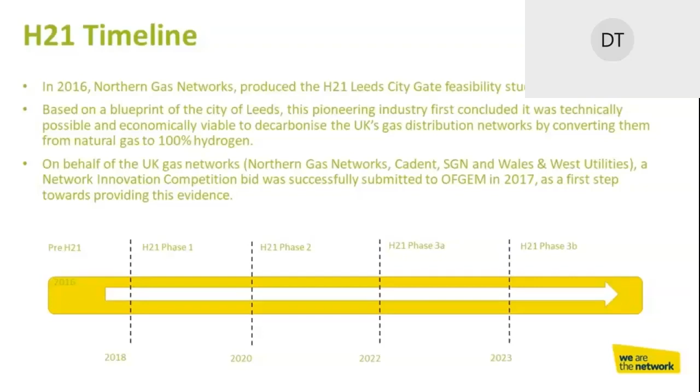So we have a number of projects within the H21 programme. I'm just going to clear up a few terms you're going to hear through this - specifically NIC and NIA, because the project is made up of both. An NIC is, in essence, a yearly pot of money set aside by Ofgem for the gas networks to bid against for various projects, specifically focused on low carbon, innovative, large scale projects such as this. So the networks, as I mentioned, bid for this and are awarded money by Ofgem.

An NIA is an allowance that each network received from Ofgem as part of their price control settlement, which can be used for innovative projects that will benefit the consumer.

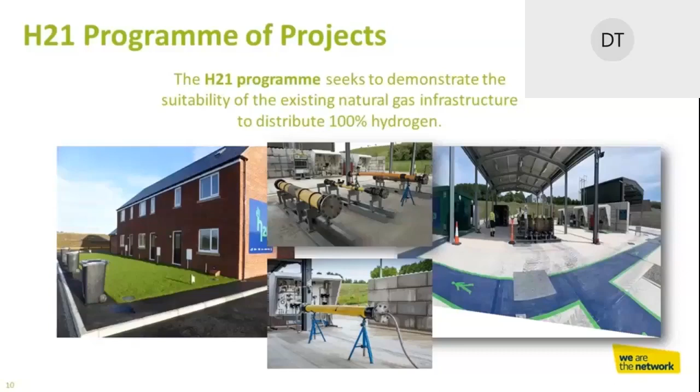So it's just to clear up what they are, really, moving forward, because I'm going to be using them a bit. So, Phase 1 of H21 was split into two phases, Phase 1A and Phase 1B.

Phase 1A was centred at the Health and Safety Executive Science Division laboratory over in Buxton, Derbyshire. That was the asset collection and background testing on what was a world-first test site built specifically for this. It tested a huge range of metallic and PE assets - valves, joints, fittings and pipes - from across the UK, from various pressure tiers and diameters, up to 7 bar assets.

As part of the UK's iron main replacement programme, a cross-section of these assets had been removed from the network, some of them in the ground for up to 100 years. On the specially built leakage rig, controlled testing was undertaken on natural gas and 100% hydrogen to see the difference in leakage levels between the two. Testing was completed in March, April this year.

We then have Phase 1B, on the right-hand side here. This was undertaken at DNV GL's research station up in Cumbria, on the Cumbria-Northumberland border, on the RAF Spadeadam Electronics Warfare Base. Testing completed there in August 2020, and this focused on consequence testing, mainly looking at risks associated with leakage, such as failures, mains fracture, third-party damage, and operational repairs.

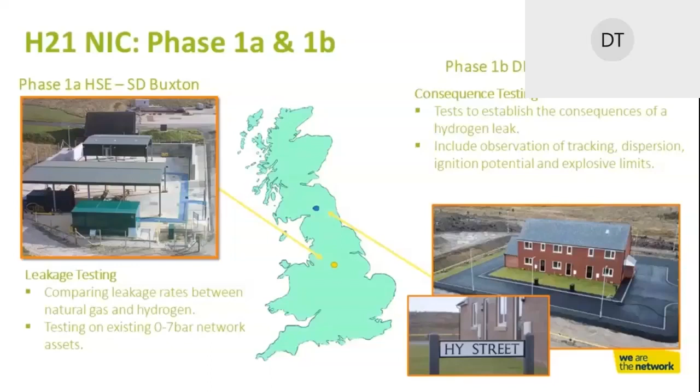As part of Phase 1, we also started undertaking something called our social sciences. Now, as an engineer myself, I personally found this really interesting, and there were a lot of outcomes from this that I didn't expect and found really different.

One of them being that, to the public, safety is not a major concern to them. They understand the safety that comes with hydrogen, the actual additional safety benefits, such as no carbon monoxide, but people give little thought about where their gas actually comes from, or electricity. They just turn it on and it's there.

So that, to me, really gives a good vindication of how safe and how good a safety record the UK gas networks have - that the first thought out of consumers' mouths isn't safety, it's actually cost, which may be the barrier that they see.

So if anyone's interested in the initial Phase 1 report, it is available on our website, so please do go there and have a look and read that - it is quite an interesting read. So I'm going to move on to Phase 2 now.

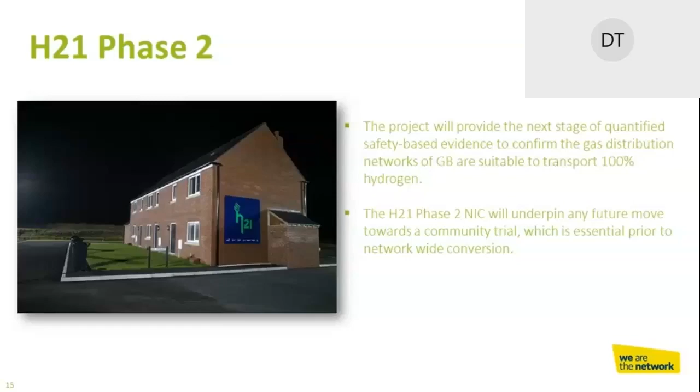Phase 2A is what we call our appraisal of network operations. This phase aims to review, test, and make recommendations to amend the operational and maintenance procedures required to work a network at 100% hydrogen. It's fantastic that there's talk of converting and bringing hydrogen to people's houses, but as a network operator, if we can't physically work on it, maintain it, connect to it, repair it, what's the point? So this is about looking at how we run, maintain and operate a network based on hydrogen.

To do so, we are going to build, and building has started, a bespoke, specially designed distribution microgrid up at Spadeadam. That's going to be built alongside our HyStreet houses, as you can see on the map - the houses on the right-hand side - with us building this distribution microgrid with various diameters to replicate the existing network up to 7 bar, from large diameters down to small. That's going to allow us to do numerous operational tests as we would in the district, to start getting an idea of how we would operate a network.

The procedures have been appraised by the HSE, with a test plan produced to detail what goes on and looking at those procedures. So it's a collaborative effort between us all.

What's really exciting is, subject to their bid being successful, this will connect to National Grid's FutureGrid. It will be a transmission pipeline that National Grid will install to connect to our distribution network right the way down to the houses. We will have a full beach-to-burner research centre on one site. That could be absolutely brilliant for learning, research, training eventually, and to get wider implications. From my point of view as a system modeler, it's also going to be used to validate network analysis software and the equations of state used in our network analysis. It's going to be interesting when that gets going.

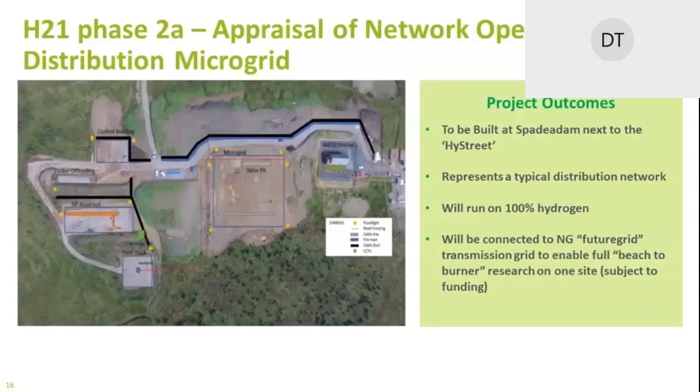Phase 2B is what we call our unoccupied trials. We've secured a site in Redcar in Cleveland where the section of network is currently in use but doesn't supply any end users. Basically, it's a demolished housing estate - the network's still in place, still operational, full of gas, but it doesn't supply anyone.

We aim to start building a test site there in January next year, with testing due to commence in March and end in late 2021. Its purpose is to establish confidence in repurposing an existing, undisturbed section of network. We'll isolate it from the current network and convert it to 100% hydrogen. We'll also continue our operational and maintenance procedure research there as the trial continues. It's going to be a fantastic opportunity to pick up on any unknowns relating to the conversion.

These pipes have been in the ground for decades, and we've done some initial main surveys to see what's there before we dig it up, but we won't know what's happening until we start. It's going to be a really good learning experience to see how these pipes, exposed for decades to fogging, monoethylene glycol, and odorants, behave where new assets haven't had that exposure. It's also a fantastic public awareness opportunity - the public, thanks to the mainstream media picking up on the hydrogen journey, have started to hear about hydrogen.

There's hydrogen trains, talk of hydrogen planes, cars, which might include our little car there, our hydrogen car. But up until now, a lot of the research has been done behind closed doors, such as at Spadeadam, Buxton, rightly so, but this will really bring it to the public.

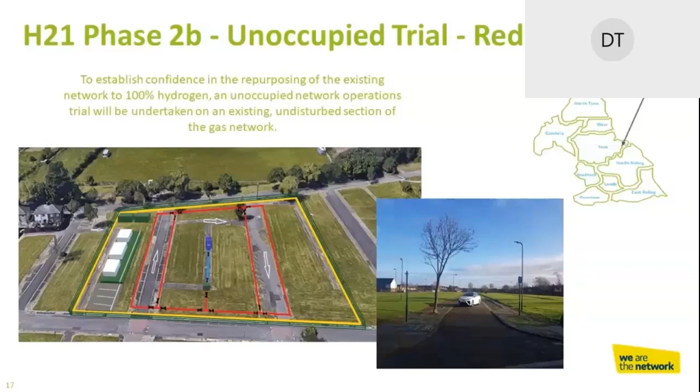They'll see this, depending on what happens with coronavirus, the chance to visit, to see, and actually see this in action. So it's been a really good community engagement as well, and the local community are very much on board.

Phase 2C is what we call the combined risk assessment, quantitative risk assessment. So following successful demonstration on the microgrid and any unoccupied trials, a robust modelling software is going to be built on a risk model for hydrogen in the existing network up to the ECV. I will be honest, this is not my field of expertise, because this is some really clever

modelling and risk building that is ongoing. But what we also have is the HyDeploy programme that I mentioned earlier, and they are doing exactly the same for downstream of the emergency control valve. So the aim will be in this phase is to compare and analyse and align the two QRAs for the two projects. And it's really important to do this at this time to ensure the compatibility of the adjoining systems, i.e. upstream and downstream, that we don't have this disconnect moving forward, and to give us a real overview

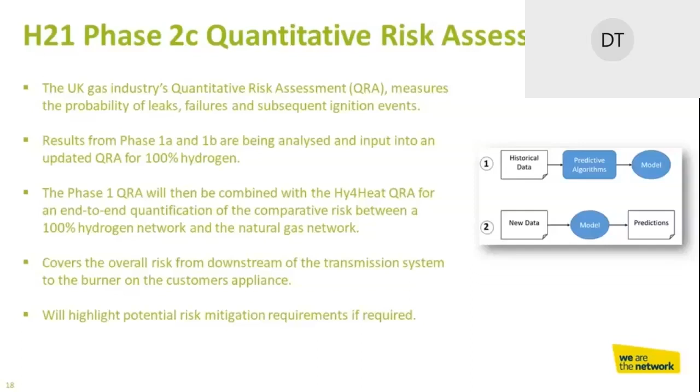prior to commencing any community trials that are going to involve both projects. So depending on the outcome of that risk assessment, it might mean additional safety mitigations and tests are required, but as I say, it's an ongoing risk building, risk modelling software process.

Phase 2D will continue the excellent work of the social sciences, again with our friends at Leeds Beckett University, but this will take it one step further to develop a suite of resources that are going to be used to communicate effectively with the public, because as I've mentioned and as I stress, it's so important we take the consumer on the journey with us.

Informed customers who are equipped to make choices about their energy future are critical to the outcome of this conversion process. We've heard the term fake news quite a bit, sadly. So any misunderstanding, misinformation could lead to poor customer choices and unwarranted concern. In the worst case scenario, if there's widespread misunderstanding and misinformation, it could lead to a wholesale rejection of any conversion and the option of hydrogen could be lost entirely.

So, as the network operator, we are the main point of contact with customers who are living within our networks, and it's our responsibility as the people who undertake the conversion to ensure that customers are properly informed and equipped to make the choices. So this is going to involve examining the language, tone and format of this hydrogen conversation message, and to allow all the gas networks to effectively communicate.

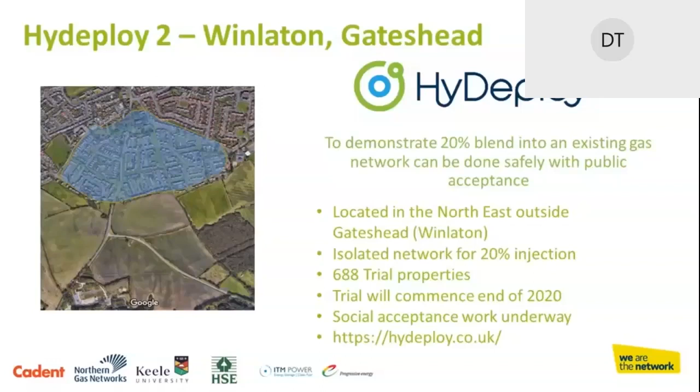Moving on to what we call our InTEGReL site. At the bottom of this picture here, you will see a little site. This is called our Low Thornley site, where the blending will happen. But also at Low Thornley, we have what is called our InTEGReL site - a large 15-acre source site, which itself has a pedigree as being an outstation for the old British Gas Research. So it's continuing its heritage as a research site.

We are building our integrated transport, electricity and gas research laboratory. This is going to be a fully integrated whole energy systems development facility, and it's a place for academia, industry, government, and small and medium enterprises to explore and test new technologies, strategies, and green energy processes for transport and electricity, all in one place, all on one site.

It's led by Northern Gas Networks in partnership with Northern Powergrid, Newcastle University, and more, and it's being used to celebrate our capability of innovation. It's breaking down barriers for hydrogen, and we have numerous plans in different areas on site. It has a high pressure gas section that we can use, and high voltage electricity, so it has a real interesting future ahead.

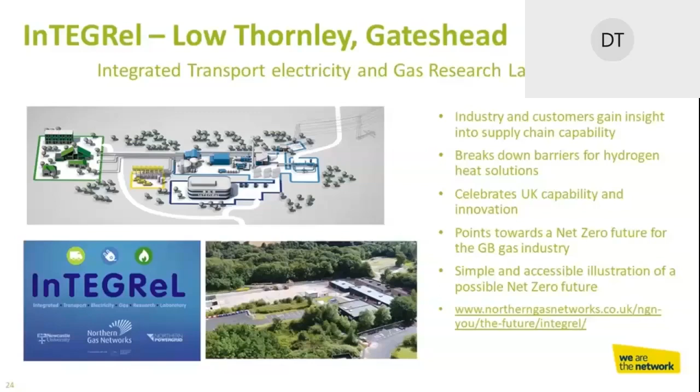Part of that, what we intend to do is build our hydrogen demonstration homes. We intend to build a typical pair of semi-detached houses with 100% hydrogen appliances to allow the public, policymakers and other people to see that this can be achieved with the right impetus and the right policy. It's a practical demonstration, it's tangible - a hydrogen boiler for a customer just looks like a box on the wall, like your current boiler.

Minimal disruption, help with the supply chain, and - as a former apprentice myself - to help with the green recovery and train the next generation of green apprentices. Training sites like the DNV Spadeadam site, we have this ready for people to start training on and looking at.

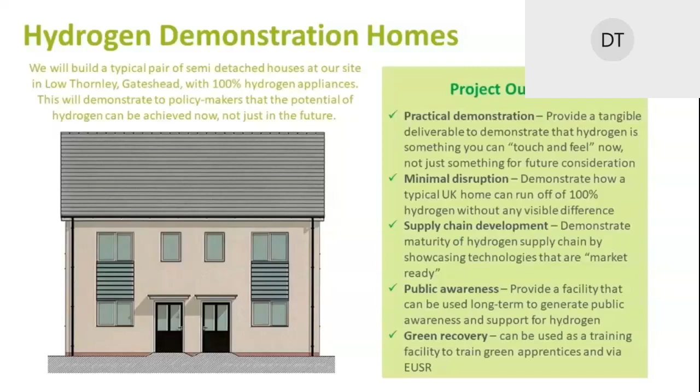So I'll leave a final thought. If the 19th century was dominated by town's gas and the 20th century by natural gas, could the 21st century be dominated by hydrogen? We'll see.